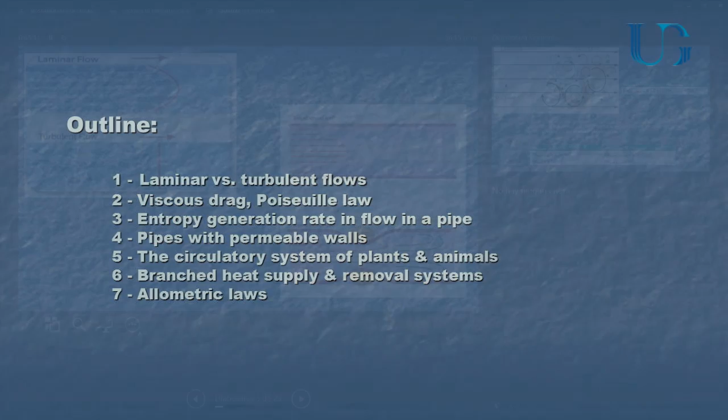Now, laminar against turbulent flow. You had fluid dynamics. Laminar flow, everybody knows what laminar flow is. Laminar flow is a flow where you have streamlines. It's so nice. Streamlines flow always in one direction. They curve all together. They don't cross each other. And they behave like really nice citizens. Turbulent flow is more chaotic. There is no streamline. The fluid behaves randomly. There is no nice velocity profile. And there are different properties of this flow.

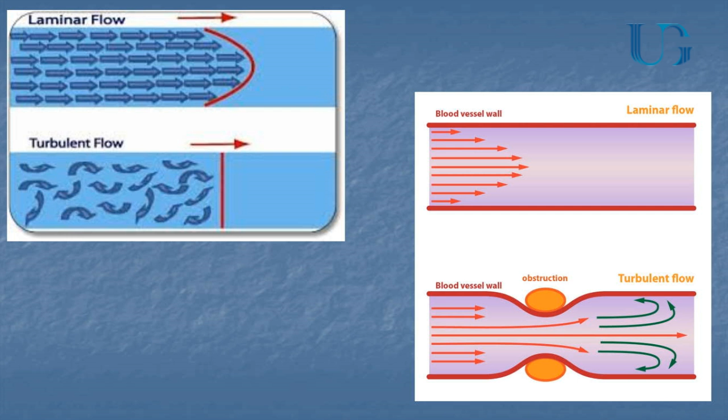Of course, why am I introducing this topic? Because I'm interested in blood flow. Blood flow is laminar in smaller capillaries, is turbulent in the aorta and in the major veins. And you know that it's turbulent because when you feel your pulse, you are making the fluid turbulent by obstructing it. Okay? Also when you do like this, okay? You can do it also under your armpits or everywhere you want. However, the idea is that you are obstructing the flow, and behind the obstruction, you get a turbulent flow. So, turbulent flow is important because if we want to discuss the flow in natural systems, we have first to understand whether it's laminar or turbulent, and then to discuss its typical characteristics.

What identifies the laminar and turbulent flow? We used to say Reynolds number. What is the Reynolds number? Reynolds number is a number that expresses a similarity. It's a ratio between two physical forces. On the numerator, you have a quantity which is proportional to the inertia force. On the denominator, you have a quantity which is proportional to the viscous force.

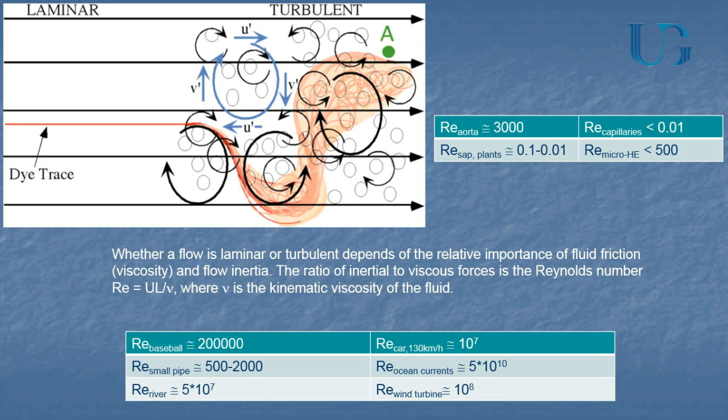Wind turbines, 100 million. It's clear that all of these flows, also the river, will be turbulent for sure. There is no way you can make them laminar. They will be turbulent. A pipe can be laminar, can be turbulent.

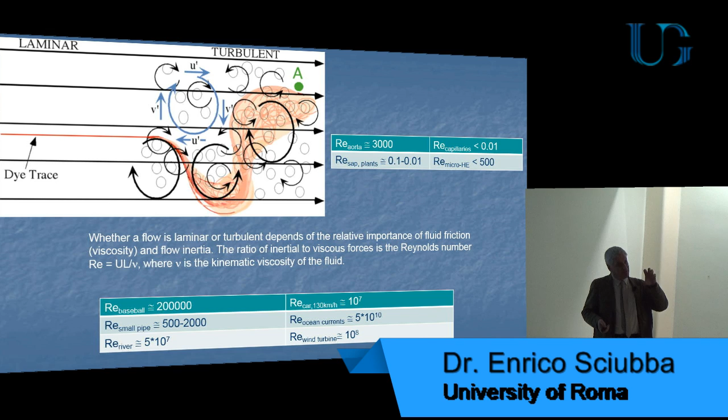Now, what are the flows in nature, like in the blood? Aorta, 3000. It's turbulent, as a matter of fact, because it's close to the heart, and the heart is pumping. So the blood is undergoing an unsteady motion, so it's very easily made turbulent. And in fact, in the aorta, you have turbulent flow. In the capillaries, 1/100th, the flow is definitely laminar.

The sap of plants is carried from the roots to the leaves at very slow velocity by capillary action and ionic action, so its Reynolds number is very low, laminar flow. Micro heat exchangers. Electronic chips are now cooled, or actually we are trying to design heat exchangers that may cool electronic chips in supercomputers. The heat exchangers are the size of a chip, stuck underneath the chip, and have to absorb the heat that the chip generates.

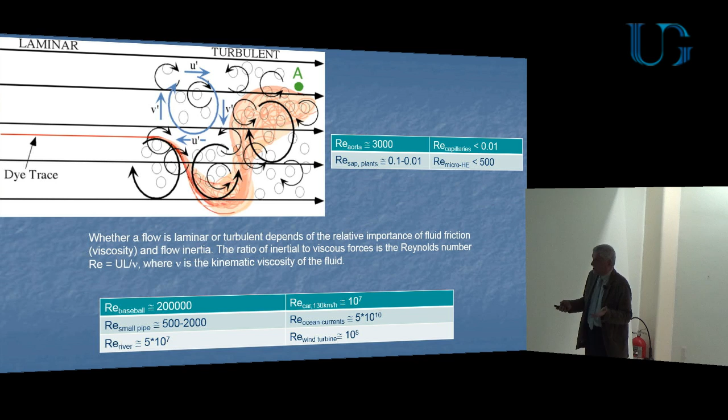Now, the heat exchangers have microchannels, and the Reynolds number in microchannels is about 500, less than 500. The flow is laminar, and that poses problems because laminar flows have lower heat exchange coefficients. So this is the idea of the laminar to turbulent difference. But let's see what the characteristics of the flows are. Turbulent flows are random. We'll see in what sense.

They are 3D. So those of you who deal with numerical simulations of turbulent flows and do these nice simulations with Fluent ANSYS or CFX of a two-dimensional flow over a wing, you are doing bullshit, because there is no turbulent flow in 2 dimensions. It doesn't exist. Turbulence is 3-dimensional. We use Fluent in my group. In the tutorial manual of Fluent, there is a nice example of a wing in 2 dimensions, and then they use a K-epsilon. This is a distortion of reality, because there is no 2-dimensional turbulence. Turbulence is by nature 3-dimensional.

There is only one flow which is 2-dimensional in turbulence. Anybody know what flow I'm talking about? Guess. No. You thought you knew. In the atmosphere, there is a level at about 10,000 meters where you are far away from the mountains and where the flow is very fast, and it's 2-dimensional on a spherical surface, of course. So it's not a flat plane.

It's a spherical surface. These are the high stratospheric winds, which can reach 200, 300 kilometers per hour. And the turbulence there is 2-dimensional because there is no disturbance from below. But otherwise there is no 2D turbulence. Another quality of turbulence: turbulent flows have vorticity. So either they produce or destroy, or at the same time produce and destroy vorticity.

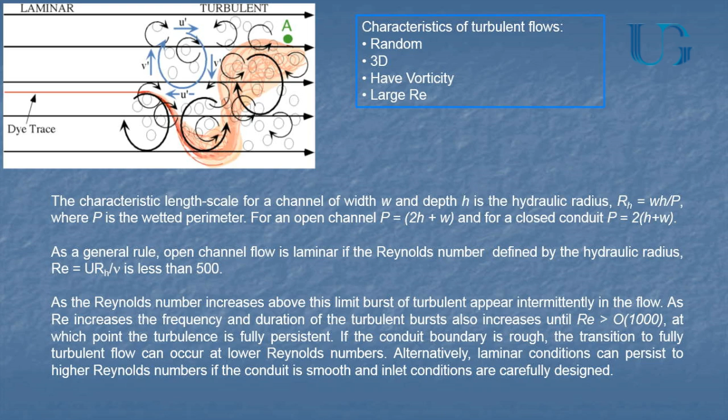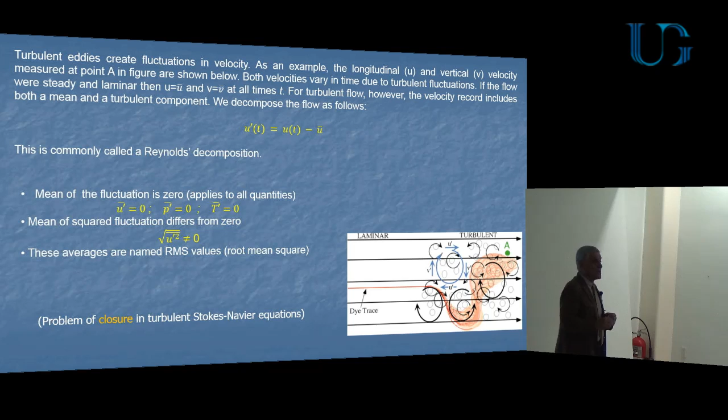Now, how do we represent a turbulent flow? We represent it by dividing the velocity which we measure at an instantaneous moment into two components: a steady state or average velocity and a fluctuation. So the actual velocity at each instant of time is made up of a component which is an average, which stays steady, but it can also change in value, though not randomly. It's a smooth function, and by some randomly looking oscillation, u prime.

And the fact is, if you take the averages of these fluctuations, the average is zero. And I will show you in a slide later why it is so. The averages of the turbulent velocity fluctuation, pressure fluctuation, temperature fluctuation are all zero. But their squares are not zero. And the reason is physical. It can also be shown by mathematics, but the reason is physical.

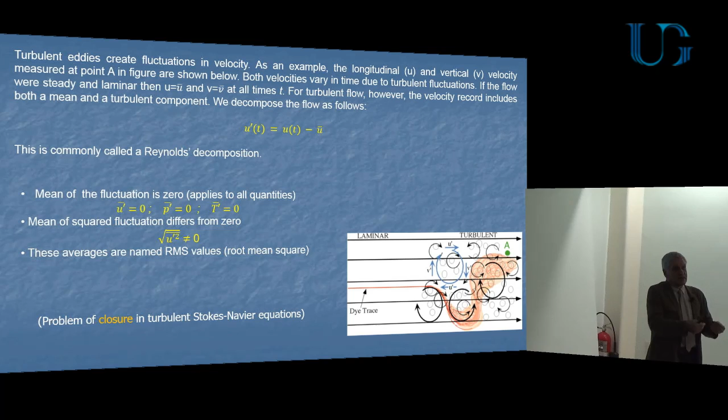What is u prime u prime? It's u prime squared. It's twice the kinetic energy of the turbulent scale. So why should it be zero? If that is zero, then you have no turbulence fluctuations, because the square must always be positive. So if that is zero, it means that u prime is always zero. But if u prime is always zero, then the flow is laminar and not turbulent. So u prime squared is always different from zero. Not everywhere, but in the field it is different from zero. Okay, I have some examples.

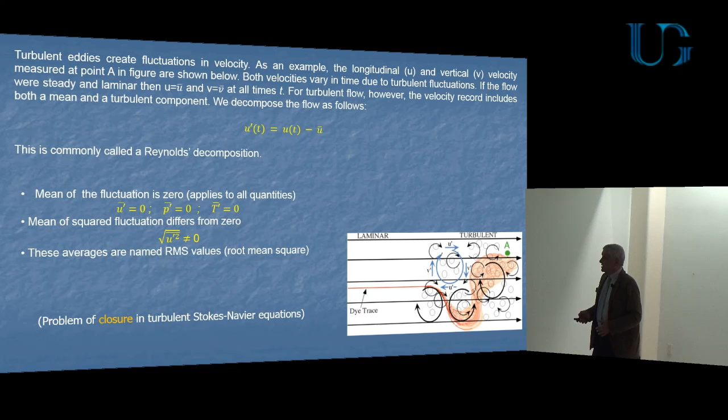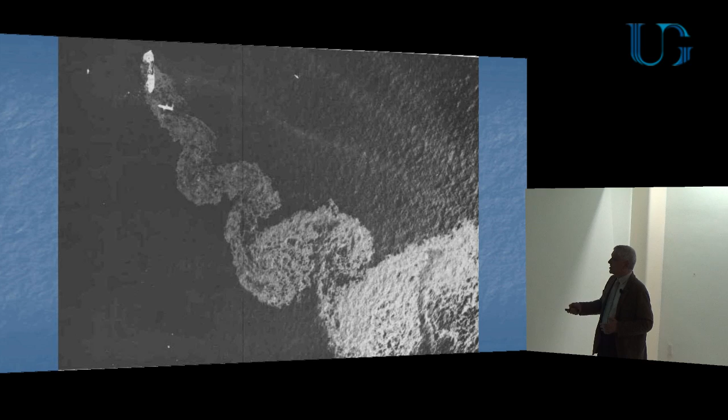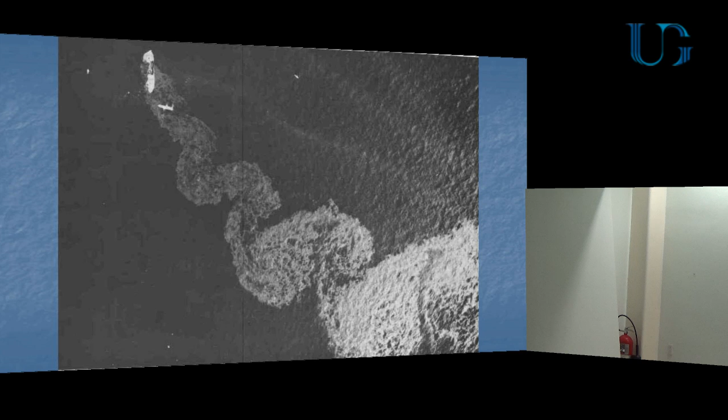You remember the Exxon Valdez accident? The tanker ran on shore in Alaska, I think, and it spilled tons and tons of oil. Now, we are not discussing the spillage, we are discussing this picture. This is the tanker, and the current at that time was obviously coming in this direction. This is the spilled oil. And this is what we call a turbulent wake. The oil is spilled from the boat, and the ocean carries it in this direction. But the oil, which stays on the surface, so in a sense this is two-dimensional turbulence, gets some energy from the ocean and starts dissipating its velocity with this turbulent wake.

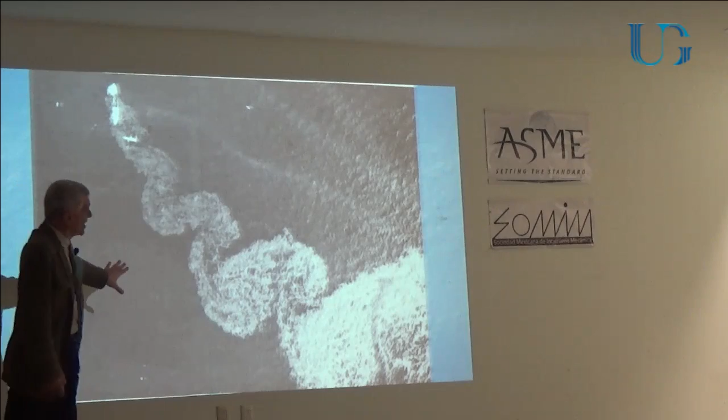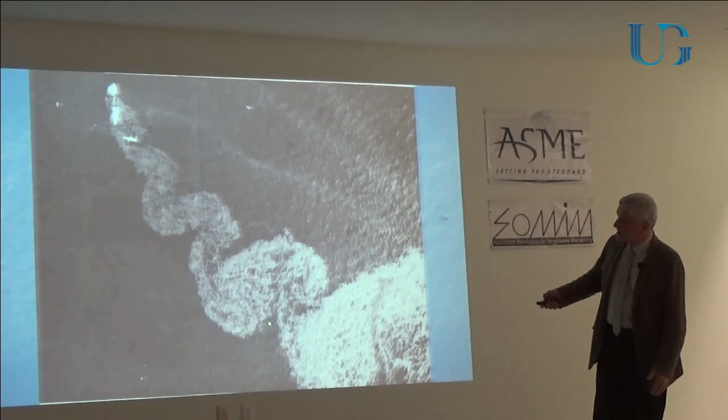And actually, that's a nice excuse if you are caught smoking whatever you don't smoke. I was doing an experiment in fluid dynamics, you know.

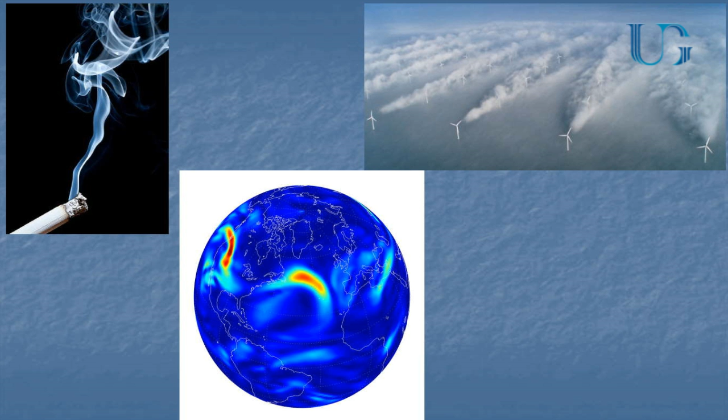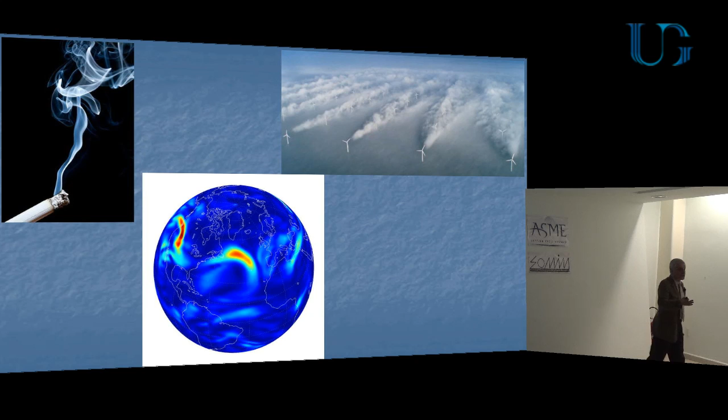So what you see here is the wake. What is of interest is the wake. This is the turbulent wake. And you see almost the same characteristics as you saw in the ocean wake. And the reason is clear. The Reynolds number is almost the same: 50 billion for the ocean wake, 1 billion for the wind. So we are in the same range.

And this is the atmospheric turbulence. This is the tropic, of course. If you see, this is Spain, Mexico here. And these are the large turbulent spots which originate the weather changes in the subtropical region. And that is also regulated by turbulence.

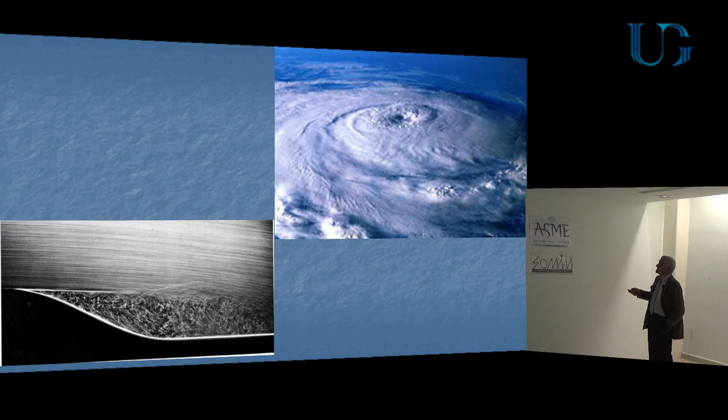This is a hurricane seen from above. And you see that except for the large scale, which is obviously a vortex, there are some small scales here everywhere which don't look like vortices, but are turbulent structures. So the turbulence is obviously three-dimensional because you see that here is something coming up.

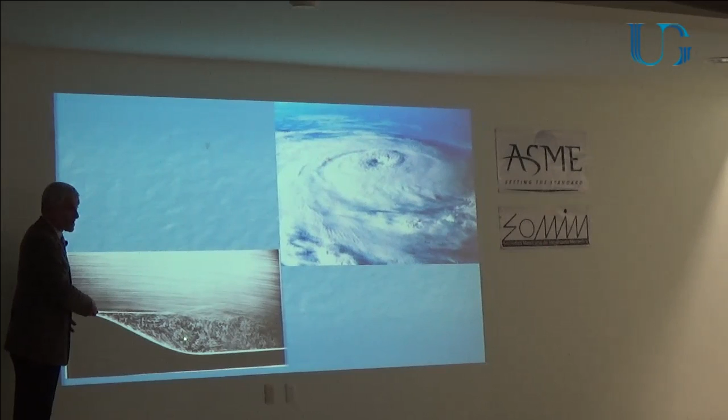And this is one of the ways that turbulence can be formed. If flow is coming from this direction, and there is a depression here in the bed of a river, for instance, then the water gets trapped here, but the mean flow pushes in this direction, and there is a pool of water here which keeps recirculating. But why is this water recirculating? Where does it get its energy from? From the main flow. So the turbulence here is extracting energy from the laminar flow to create turbulence.

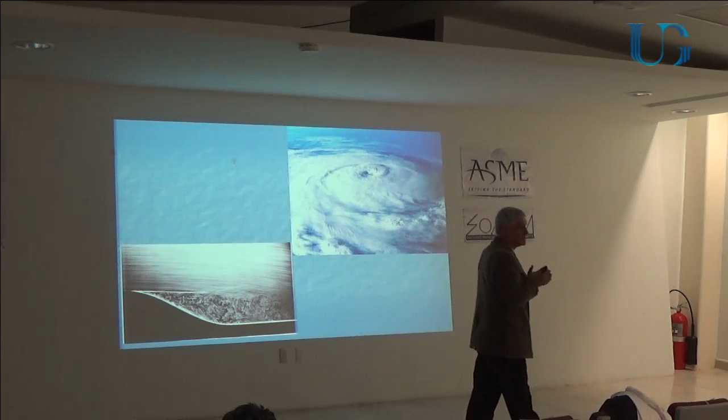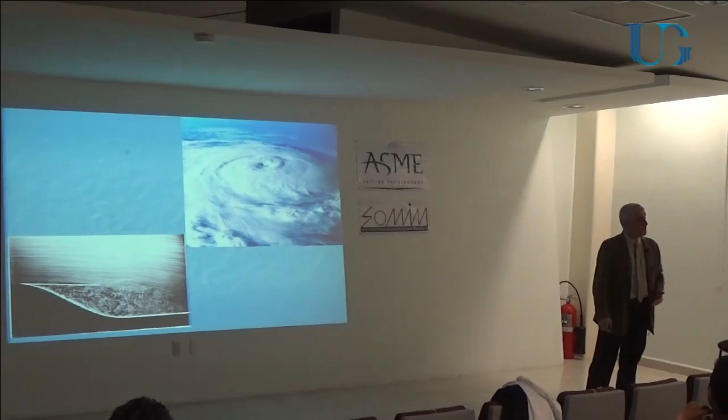And this is always the case. Turbulence, to be maintained, needs energy. To maintain these motions, it needs energy. So if you take away the source of energy that maintains the turbulence, turbulence decays into laminar flow again. Okay.

And this is what I was talking about before. This is the laminar flow, this is time, and this is the velocity magnitude. Laminar flow, this is transition where you get these little fluctuations starting, and then you have fully developed turbulent flow, which means that you have an average velocity and fluctuations on top of it.

And when you talk about the velocity profile, instead of having the nice Poiseuille profile, which is a parabola, you have another shape which can also be described by a formula, r to the 1/7, but that doesn't mean anything because that's the average velocity shape. But the average velocity doesn't exist in reality in a turbulent flow, because what you see is this: the average plus or minus the fluctuation. And what you see here is something like this. Okay? So this is what makes, for instance, measurements in turbulent flow more difficult.

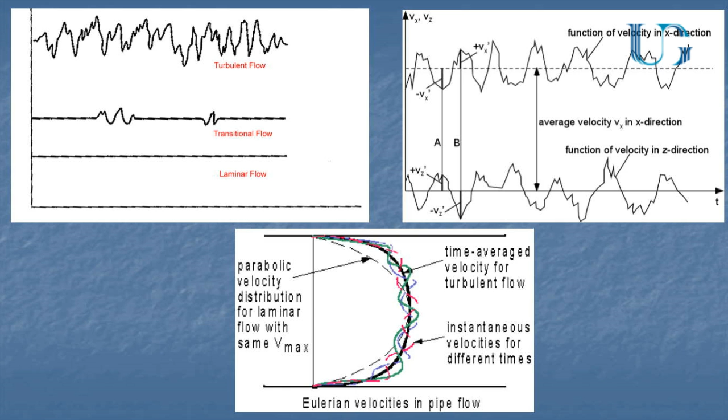And this is the moment in which turbulence is created. Suppose that you have a laminar flow in flat water, okay? A small river. And there is some gravel on the bottom of the bed of the river. So this creates some instabilities in the flow. But if the bed becomes flat again here, these instabilities, which are called Tollmien-Schlichting waves, die out because viscosity kills them, dissipates their energy. And the flow becomes laminar again.

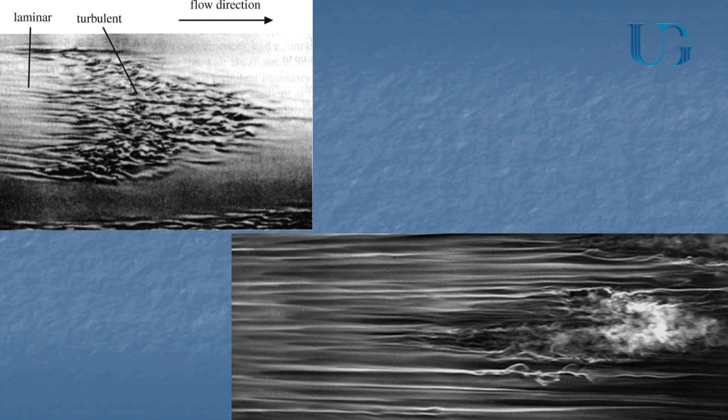If there was some more gravel here or some more heat input here, hot spots here, then the turbulent spots would multiply and they would draw so much energy from the laminar flow that the flow would become turbulent. Okay? And it will stay turbulent as long as it has some source of energy input. Okay? Is this clear?

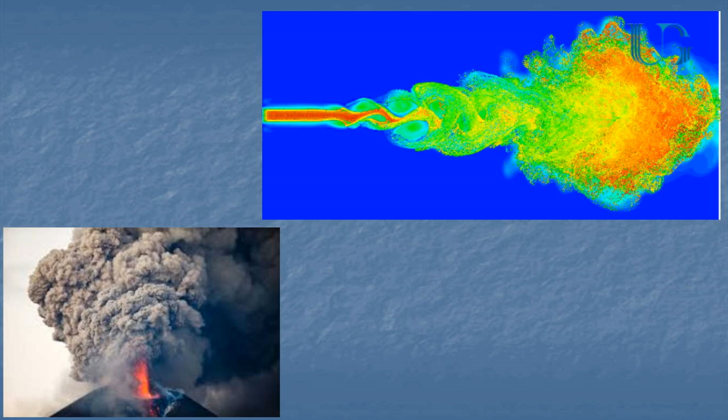Okay. So we are finished with turbulence, laminar and turbulent, the difference. Starting tomorrow, I'm going to talk about flow in blood, capillaries, and in plants. And this flow is always laminar. And we can also assume that the capillaries are circular tubes. We are interested in studying the relationship between the pressure drop in a tube and the flow rate. And to study this, we resort to the Poiseuille law. Poiseuille law, remember, it's a parabola.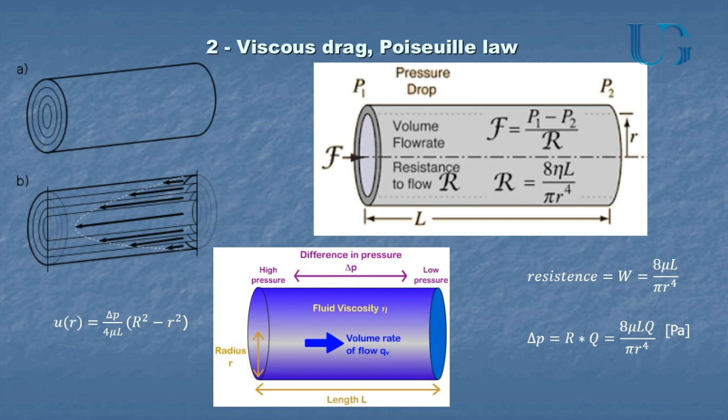Now, is the pressure drop all we are interested in blood circulation? I maintain no, not in blood circulation, not in heat exchangers, not in sap circulation, not in anything. We are interested in entropy generation, because whenever there is a pressure drop due to viscous forces, there is entropy generation.

See, this morning in the talk, we heard expressions like energy production, energy consumption. I don't like these expressions because energy is conserved. So you don't produce and you don't destroy energy. What you do, you convert energy into a lower or a less useful form, which we call waste heat.

That's the problem. When we have the flow of a fluid in a pipe, you have a certain enthalpy here, velocity, suppose, okay? Forget the temperature, velocity. And you have a lower velocity here, or you have a certain pressure here and a lower pressure here for the same flow rate. So where did the delta P times Q work go? Did it disappear? No, because energy is conserved. It went into T0, reference temperature, delta S.

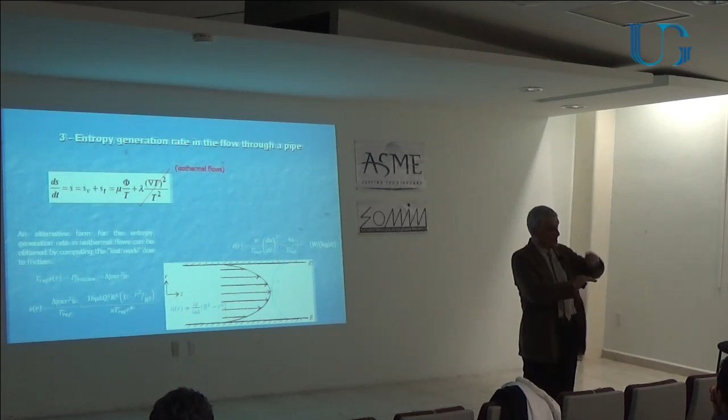And that is clear because you have a lot of heat flowing through a very large temperature differential, but the heat at 400 degrees is transferred to 30 degrees Celsius. And the quality of this heat is much decreased. You can't do any work. You can't produce any work with a 30 centigrade, 300 Kelvin heat. But we can generate a lot of work with a Carnot engine and a 670 Kelvin heat. Okay? So there is entropy generation also in heat flow.

And the guy who first gave us rational formulas for calculating the entropy generation rate in viscous and thermal flows was Adrian Bejan. And he gave us this formula, I think in 82 or something like that. He said the entropy generation rate, this is in watts per cubic meter, I think, or per kilogram, is given by mu, the dynamic viscosity, in kilograms per meter per second, times the dissipation function of the Navier-Stokes equations divided by T, and this is the viscous entropy generation.

The dissipation function is that function that you never looked at, which is written in the bottom of the page of the Navier-Stokes equations, and which looks like du over dy squared, plus dv over dx squared, plus du over dx plus dv over dy squared. Okay? And then there is w as well. So this is a dissipation function which is always positive because it's a sum of square terms. And multiplied by the viscosity, divided by temperature, you have the entropy generation due to viscous actions.

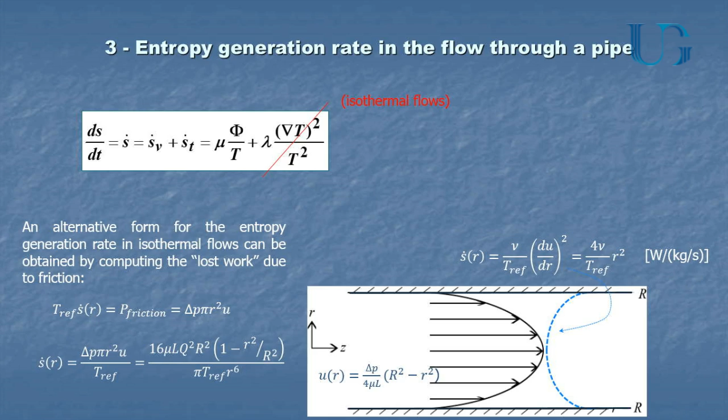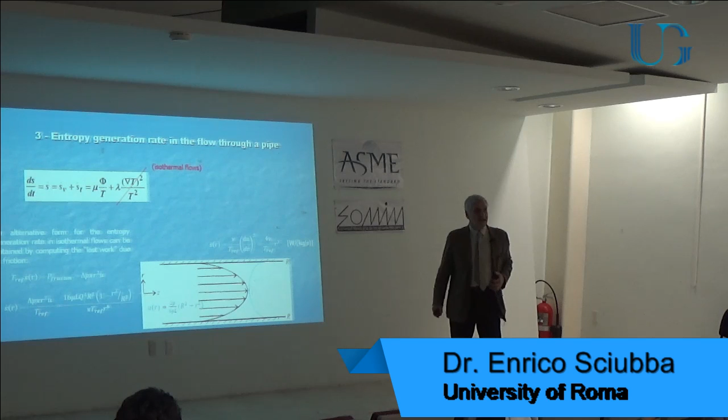Now, I'm interested in this because of the flow of blood through my body. If there is any irreversibility in this flow, then my heart has to make up for it. Okay? So I have to use metabolic energy to feed my tissues with blood. So the lower the entropy generation rate in the blood system, the better it is. And I'm going to discuss this item tomorrow, and I need this thing tomorrow.

There is one thing which I'm not considering here: permeable walls. Why? Because it's too difficult. Now, Professor Leonard, again, talked about membranes which are permeable to some molecules and not permeable to other molecules. We are trying to build these membranes artificially, but nature is based on these membranes. Plants, organisms of any kind, our bodies are filled with these membranes.

And one of these membranes is in the wall of the capillaries. This is a red cell. The red cell flows through the capillary, but the wall of the capillary is permeable to certain items, not to the red cells, but to certain items that have to get into the tissues. Oxygen, for instance, and nutrients, and vitamins, and hormones, or amino acid, or sugar.

And also to CO2, because CO2 is gotten into the capillaries, which take the, let's say, dirty blood back to the heart. Okay? So the capillaries have to be permeable in two directions to different stuff. And they are. So suppose that I want to include permeability in this picture. Then I have a concentration here and a different concentration here.

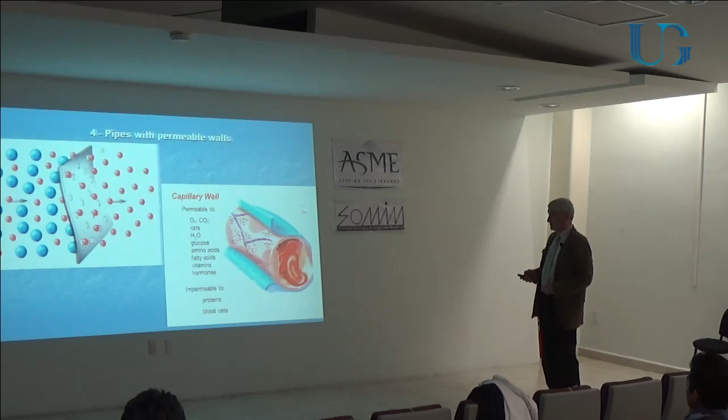Different Gibbs enthalpy value. Which means if I have a flow in this direction, I have an entropy associated with this flow as well. So I should go back to the previous slide and say there is another term here, the entropy of permeable walls. But it's a very difficult term to compute, so I skipped it. Okay, I'm not considering it. Now, this is actually what I'm going to talk about tomorrow.

So we have to understand how plants and animals circulate their substances. This is a schematic representation of a tree. The roots suck some water. Actually, they don't suck water. They are permeable membranes. And they absorb water and nutrients from the ground due to the different concentrations in the ground and in the root. So it's a permeable membrane again.

And then this water, mostly water with nutrients, is supplied to a system which is called the xylem or xylems, a myriad of small pipes that bring the water up the tree, to the leaves. You know how this water is transported? Capillarity. Capillarity, though, would bring the water up to 9 meters, 10 meters only. Okay?

How about plants which are like 30 meters high? They combine capillarity with another action, which is called the ionic movement. These are items which are being studied right now. Suppose that this is the wall of the xylem. There are points in which the molecules of the cells of the xylem get hooked to the polarities of the water, and then they release the polarity. So the water is actually walking up this ladder, so to say.

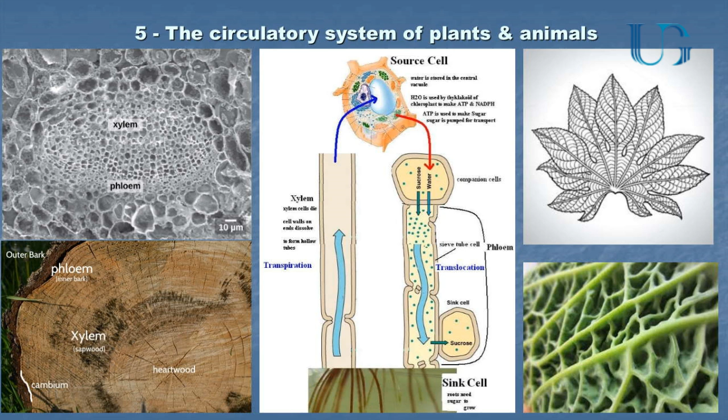Okay? The new wood is outside of the trunk. So this is the circulatory system of a plant. And in the body, it's very similar, except that we have a pump. The pump, the heart, pumps the blood through the aorta, and then it goes through smaller arterioles and through the whole body, to bring the nutrients, extract the detritus from the cells, and take it back through the veins to the heart to be put in circulation again.

Okay. And the system works like this. The blood, which has oxygen and comes from the heart, flows through the main arteries and then through the smaller arteries until it gets to arterioles. The flow in the main arteries is turbulent. The flow in the arterioles is laminar already. Then from the arterioles, the blood gets into capillaries.

The capillaries have two functions. Let's follow one of the capillaries, this one. In this portion, the blood provides the tissue around it with oxygen, nutrients, and whatever it needs. Okay? In this portion, the capillary extracts from the tissue the organic detritus.

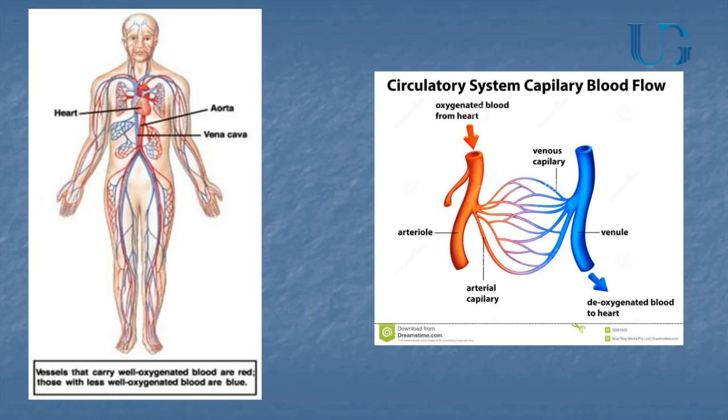Notice that mass flow rate remains the same. So here I have a certain mass flow rate, I lose some up to here, but then I gain some again up to here. So the mass of the fluid which circulates remains roughly the same. Of course, we have literally millions of these capillaries in our bodies.

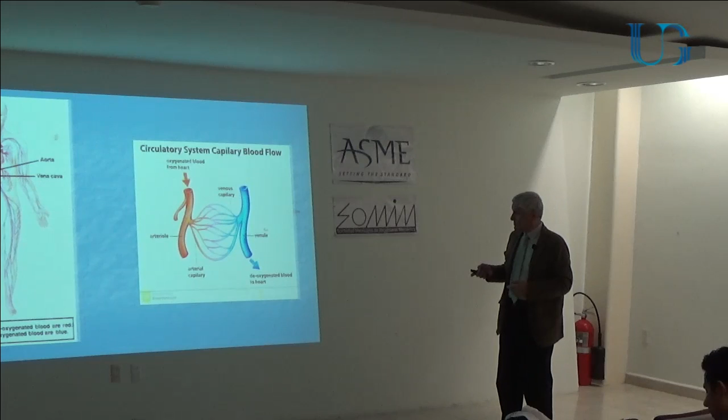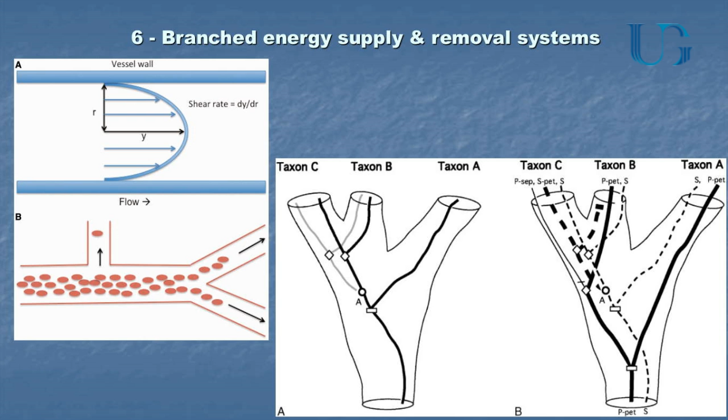And the reason I'm interested, well, the talk tomorrow is about these capillaries, which are laminar; they have a function like this. These red cells flow in a laminar flow through the capillary. This is another capillary junction. And then there is a bifurcation. People have been looking at plant or capillary bifurcations for centuries. And from the beginning of the 20th century, people were interested in this issue.

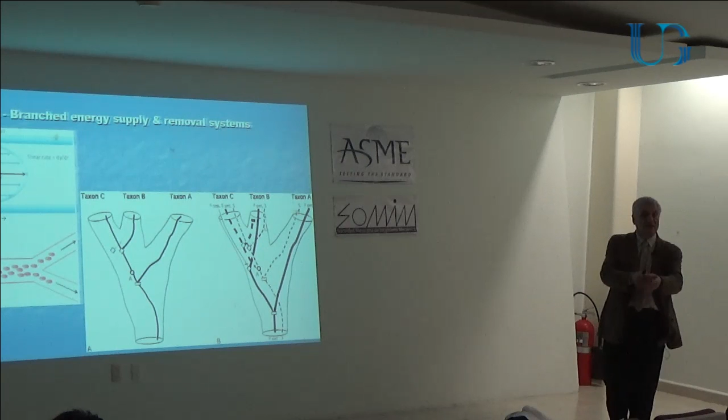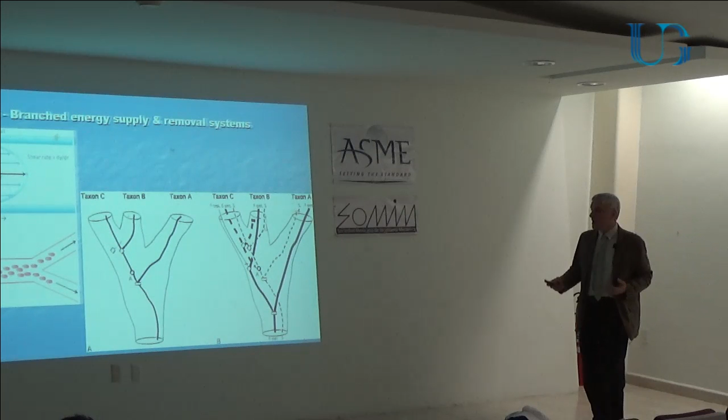If you look at trees, for instance, the branchings of the trees, they look the same. Okay? Even leaves, they look the same. And if you look at tissues and the capillaries, the branchings look very similar to each other. So there is an interest in understanding why. Is there any physical reason? Is it by chance? Or are they not similar to each other, and it only looks to us that they are similar? This is an important issue, I think. So what I want to do tomorrow is to examine this.

Suppose I have a bifurcation. If I have two pieces of capillary in series, then the pressure drop is given by this formula. The resistance of the complete branch is equal to the sum of the resistances. If, however, the branches are in parallel, like in a bifurcation, then you know from fluid dynamics that 1 over the resistance is equal to the sum of 1 over the resistances of the individual branches, and you get a different formula. So for a complete bifurcation, you have this in series with this, and so you obtain this formula here.

But look at this formula. L0 is this length. R0 is this radius. R1 and R2, suppose they are the same, okay? They must be smaller than R0 because they are carrying half of the blood. But if they are smaller, their resistance is much higher. If they are half, the resistance is 16 times higher, 2 to the 4, okay?

So there must be a reason, because nature doesn't work by chance. Well, nature works by chance, but evolution is a very selective tool. So if two plants evolved such that one had a very high entropy generation here and another had a very low entropy generation, it's unlikely the one with the high entropy generation survived evolutionary-wise. Why? Because the other one, with the same amount of solar energy, would waste much less energy to grow. Is this clear?

No. Yes or no? Repeat. So it was not clear.

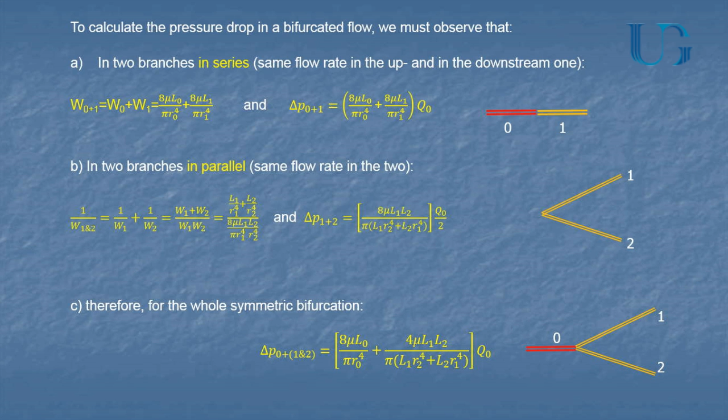Okay? So this is an interesting topic. This is what I'm going to talk about tomorrow. And the problem is this. People have been studying these branchings, and there are two types of laws that came out. One is isometric law. Isometric law is geometric similarity.

A sphere is a sphere, whatever the radius is. And the volume of the sphere is always equal to 4/3 of the cube of the radius. The sphere is this, or like this, or the sun, it's the same thing. This is an isometric law. Examples of isometric law are also in nature.

There is a snail. I was told you call it carapacho? No. What do you call a snail? Caracol. I'm sorry, caracol. Carapacho is another thing, the thing of the crab.

Okay, a caracol. There is a species of caracol which keeps a certain shape when they grow. They keep the same shape. They grow isometrically. In that case, it is correct to say that the volume is equal to the height to the third, which doesn't mean that it's equal to, but it's isometrically equal to. So there is a constant that multiplies the height to the cube.

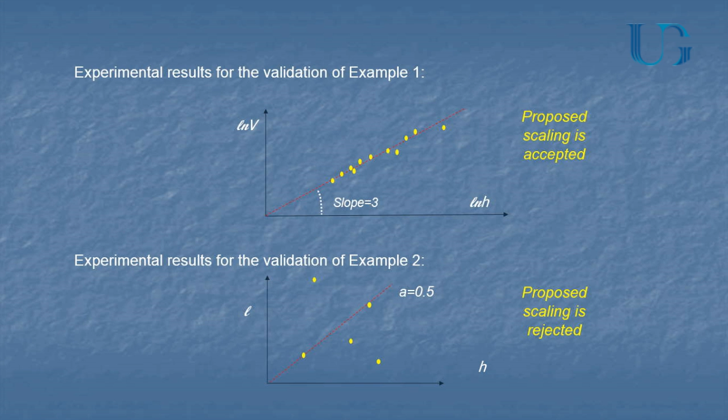But even if natural structures do not evolve according to isometric laws, they may still evolve according to allometric laws. Allometric comes from Greek, allos, different, metric, measure. Allometric scaling is actually quite common in natural artifacts. This is an example with crabs.

There is a certain type of crab that has a fixed ratio, this is our assumption, between the length of its pinch and the body size. So if this ratio is supposed to be 0.5 or whatever it is, this is the theoretical line. This is the measured result of the experiment. So the law is allometric for sure, but not with the shape that we thought.

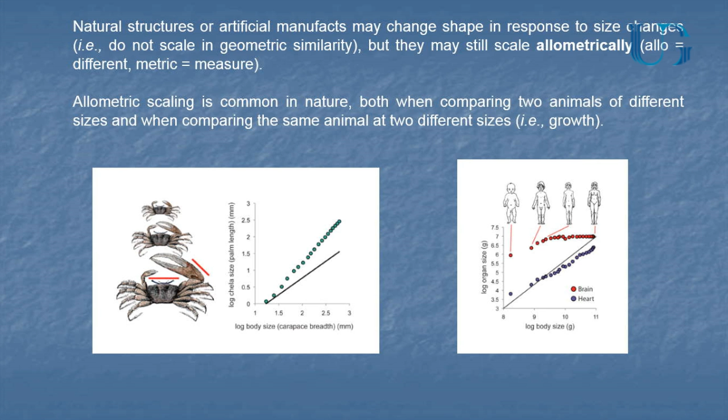What I'm talking about tomorrow, those of you who are coming to my lecture, well, you have to, so all of you, sorry for you. There is a law which has been developed starting from the beginning of the 19th century, which says that there are certain ratios between the radii of different branchings in capillary flow. It's called the Hess-Murray law. This law has been exploited in the design of technical structures and interpretation of natural structures, and the main proponent of this theory is a friend of ours, as a matter of fact, Adrian Bejan, who is a very famous thermofluid dynamicist.

Convection, heat convection. Yeah? Yeah. Very difficult book, by the way. Very difficult book. Difficult, yeah, to teach from.

So, however, I will try to convince you tomorrow that Adrian's theory is based on a law which is not correct. It's an allometric law which is not correct, and I'll show a different energy balance which leads to a different law. Okay? So this is why all of these topics were important. These were like introductory topics to the talk tomorrow. Okay? Thank you very much.